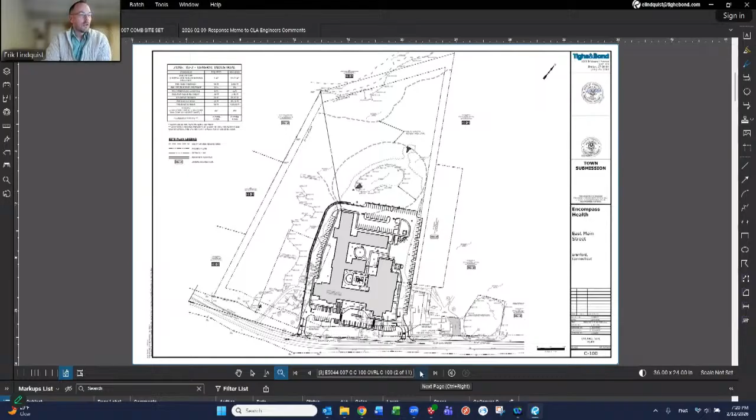This is the stormwater management plan, which shows the grading along the sides. This is broken up into two sheets just for clarity. It gets kind of confusing if it's zoomed out too far. But there'll be a series of catch basins around the entire site. I would say about 90% of the drainage, I don't have the exact number on me, but I can get that for you if you need, goes out to the rear pond.

There is one structure here with a water quality structure that will take runoff from this area of the front of the parking area. This is simply because we want to intercept this flow before it gets out onto the state roadway. And we provided a separate discharge here with a level spreader that will control flow and maintain flow to the wetlands.

Obviously, I'll get to a watershed map in a little bit to show the comparisons and how we're trying to match and make sure we're being consistent with drainage patterns on site, which is something we always try to achieve and maintain. But the large mass quantity of the runoff does go out to the rear of the site, and that can be seen here. So from both sides of the building, we have the drainage coming out back.

There'll be a water quality structure in the rear of the building, which will provide removal of sediments and oils and things of that nature before discharging into a sediment forebay, which will help alleviate some of the sediments that do make their way through the structure, the smaller particle sizes.

And then there will be a wet detention pond at the rear of the site, which will maintain a permanent pool sized for the water quality volume of the site per DEEP requirements for a wet pond. There will be an outlet control structure on the far northern corner of the pond, which will have a low flow orifice to maintain that permanent pool within the pond and a vegetated shelf with the preferred wetland species.

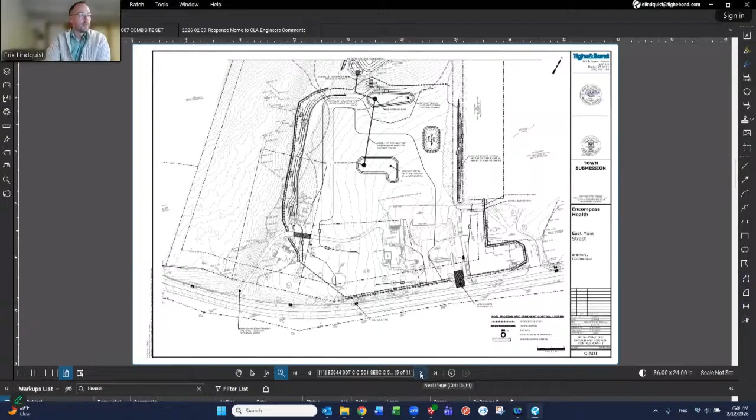We would provide locations for sediment traps to collect sediment from this flatter area that we're going to have to excavate and kind of maintain out there until the building gets started. Those will help alleviate throwing excess amounts of sediment out to the retention pond. So this will get further elaborated on in the revised sets. One of the comments that came back from peer review was how the pond was going to get phased and constructed. They came up with some very good questions, which we're going to be incorporating into the plan. Essentially, we're going to have two storage piles back here that will be part of the erosion control plan.

One will be for spoils from the pond as we remove material, so the lower layers of material that are pulled out to make the appropriate volume in the pond will be staged in one area so that they can be dried and then potentially reused on site. Then there'll be another pile for invasive species that'll be allowed to sit on another staged area over on the side, which will allow those to dry out and then be removed from the site and taken to a landfill. Obviously, we have further erosion controls back here.

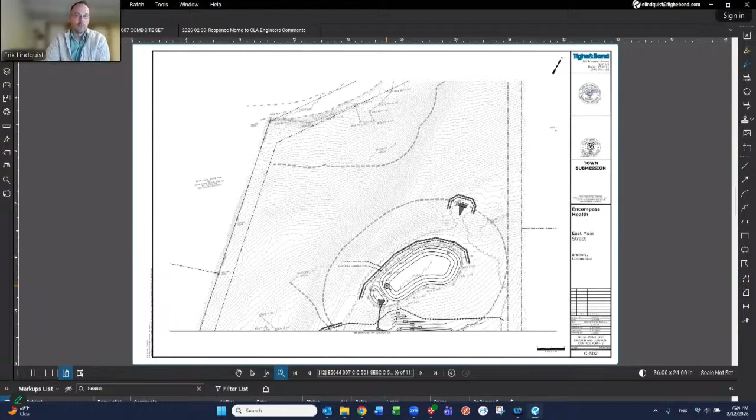There were questions about how this will be dewatered. There'll be a series of hay bale checks that come down the hill. Those will also be added to this plan. The pond will be pumped out in this location. And the idea is to have this work done as early as possible, have the pond stabilized before we start discharging flow from the site to it so that it's functioning and operating to the effectiveness that we are looking for. Moving forward, these are obviously the details for the erosion control. We don't need to go through all these.

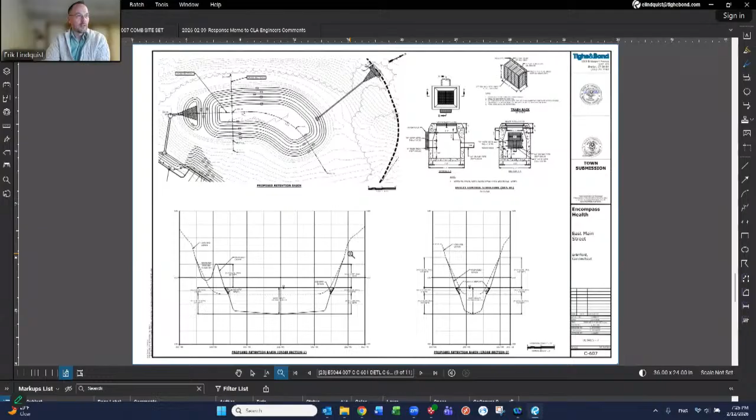The area where we're demoing the building over here, this will be grass mostly with some trees to help provide a nice buffer. There'll be various landscape buffers along the property lines to the neighbors. We're trying to maintain the tree lines on all the other sides and provide some plantings at the base of the wall. We're going to probably beef up the plantings in the close proximity to the wetlands.

That was another comment that came from the third-party review as well as the town review about the proximity of the wetlands and just trying to do things to help protect that close range of construction activities. But this will be a retaining wall right here that will help protect any degradation to the wetlands, because retaining walls are excellent for preventing erosion down the hillsides. They kind of act as a barrier wall. So the placement of this wall is actually in a great location for helping prevent and protect that wetlands.

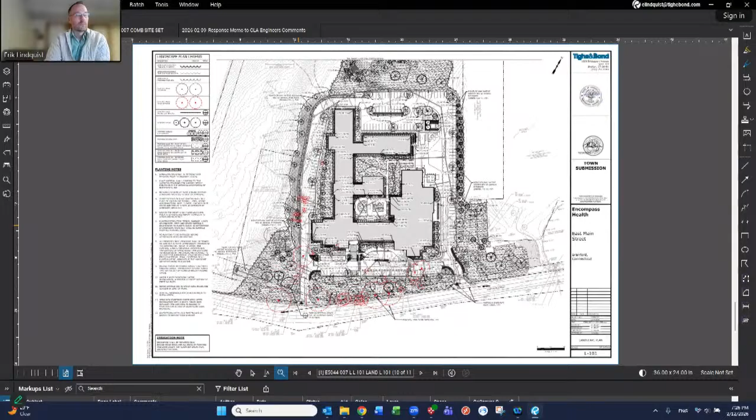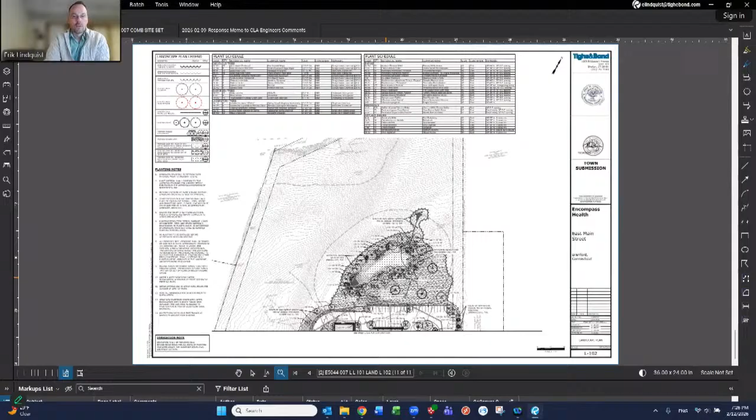As noted before, there will be a series of wetland plantings and enhancements to the wetland to make this a more functioning and aesthetic wetland. So those are shown here, and those have also been reviewed by the third-party engineer. So that's essentially the layout of the site and what we're proposing out here. I'd be more than happy to answer any questions or go through the memo from CLA Engineers. But I'm more than happy to pass it along to you, John, if you want to take it from there.

Thanks, Erik. So I think we're doing pretty well, Mr. Chairman. We're only at 7:27. So if you want to go to commission questions or the peer review, then we can continue on. Yeah, I think it would make some sense, since some of the peer review items have been addressed by Mr. Lindquist's comments. Maybe we go to the peer review, and then the commission can have both of the material that was reviewed to comment on. So why don't we turn to the peer review folk and see what their comments are at this point.

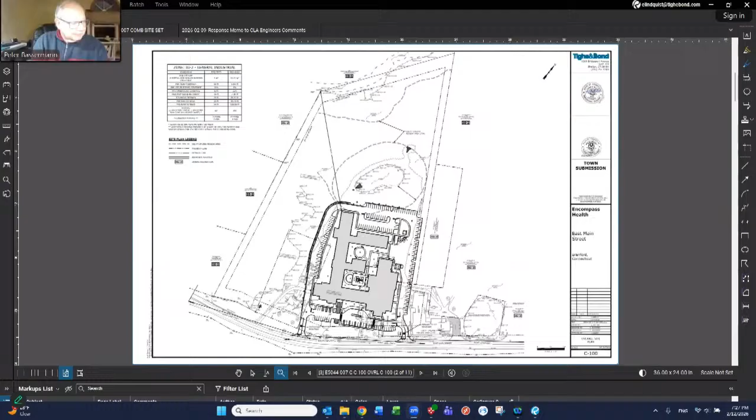Sure, I can start off. Kyle Hobbert from CLA Engineers. We're located... Can you turn up your volume a little bit? Oh, sure. How is that, better? Oh yeah, good.

Okay. Good. Again, Kyle Hobbert from CLA Engineers, located at 317 Main Street in Norwich. I'm a professional engineer with the company. I did the engineering review for this project for the third-party review. And with me tonight is Bob Russo from our office. He's a certified soil scientist, and he reviewed those aspects of the project. Bob and I both walked the site on January 23rd, prior to the heavy snowfall, thankfully. And we also reviewed all of the application documents, the plans and the reports that were submitted as part of the application. It was a very thorough set of documents and reports and plans that were provided.

We then went through the documents and provided a series of about 26 comments to the plans and to the reports. We have subsequently met remotely with the applicant's team, and they had provided a response letter noting how they would plan to address the comments in our letter. And essentially, I think their plan to address the comments from our letter is appropriate, and when incorporated into a plan set, would be in good shape. And Bob, please feel free to add on to any of your comments.

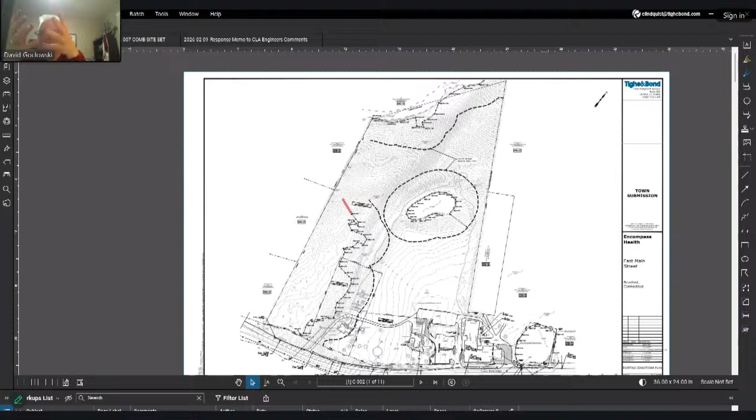This is Commissioner Goclawski, and I'm not sure who can answer this question. You're going to enhance the current man-made pond. Is that correct? Correct. And are you making it deeper? You're not making it wider or bigger. You're just enhancing what is currently already there.

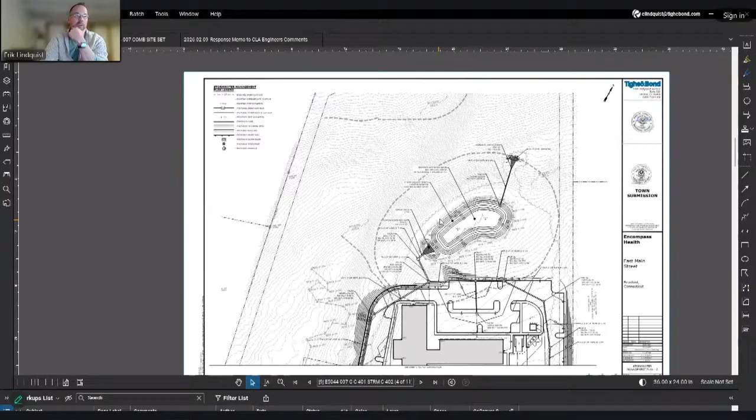Yes, what we're doing for the pond is the limits of the grading. So this is the berm of the pond, and if I zoom in, it's a little clearer. But this right here, where the wetland line is, is essentially the berm of the pond. This is where it's flat, and you can kind of walk around it and have maintenance, and this is the grassed area as you walk out the site. From the berm in is where this work is being done.

So essentially, we're going to be carving out this pond to provide the DOT or DEEP required wet pond parameters. So you need to have 1-on-3 slopes with, I believe, a 1-on-6 vegetated shelf at the water surface line, and then it goes at 1 on 3 again. So in order to meet those requirements and what they lay out in the stormwater quality manual, that's how the grading has been done, and you also have to have, I believe, a 4.5 foot standing water surface elevation, which discourages phragmites and things like that. So it needs to have a certain depth. So all those parameters are what have built this, as well as the water quality volume.

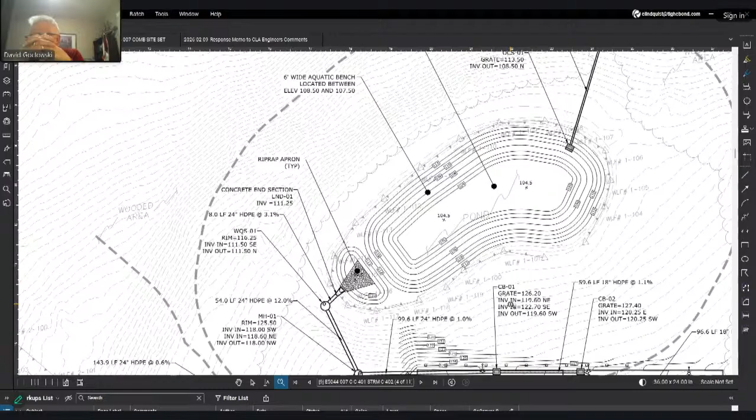So at the end of the day, there will be a little extra excavation out of the bottom of the pond, likely. I don't know the exact bottom depth of the pond. We didn't go out there with a pole and measure it, but my expectation is that it will be cutting out a couple of feet. That will take this down a little bit deeper, but the perimeter of the pond, none of that will change. It's simply reshaping the interior of the pond. So the point is you're trying to make the pond better than it currently is. Correct. Okay. Thank you.

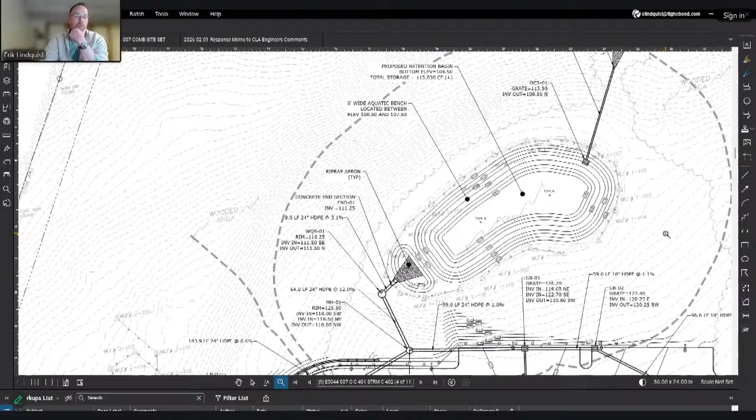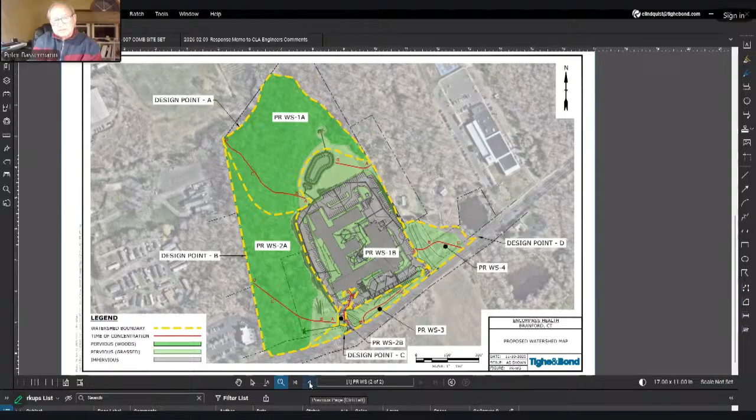And a different question, this is Commissioner Bassermann. I believe you said there was no hydrological connection from that pond to anywhere. Is that also true of wetland number 3 and the pond there? It's self-contained, it doesn't go anywhere? Matt, I could let you speak to that one.

I did not delineate any way that it would connect off-site. However, it's possible that it does. It's possible that there is a culvert, but that was not the point. We're not doing anything over there. So I don't think that, if it does connect, it would just connect across the street. But again, I did not see while I was out there a culvert that went underneath the road. That doesn't mean that it's not there.

Erik, I don't know if there was a survey for that area to pick up a culvert. I don't recall seeing one either. There is a wetland on the other side of the street, and there may be connectivity between these two. It just wasn't in our area of review, and we didn't necessarily look at that because our scope was in this area. But like Matt said, there may be a culvert in there. I could look at the survey and see if there was something, but I don't recall seeing anything.

And what's the disturbance in the area that abuts that pond? It looks like you got the yellow demarcation line. What, if any, disturbances are in that area? This isn't a disturbance line as much as it is a watershed that's just delineating where the flows are going for this design point. So point A is where the flow is going. So this is just the water area that's going to it. So we're obviously not disturbing the dark green areas up here either.

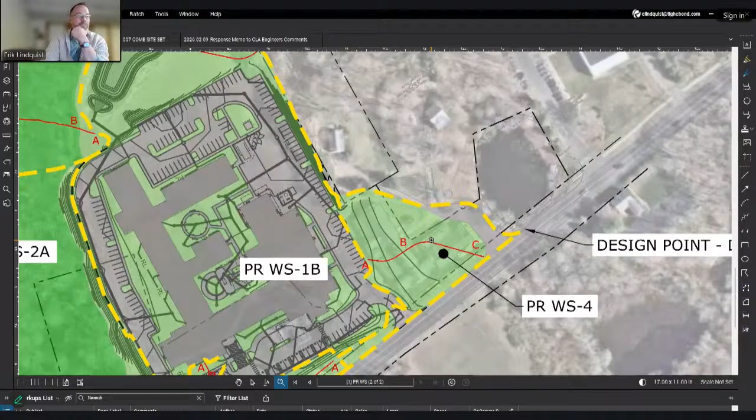So basically, if I go to the proposed plan, you'll see there is an existing building here. It's a little hard to see. It's the existing commercial building that's here, L-shaped. That's going to be demolished, and this is going to be turned into grass and plantings. There's an existing driveway that services these two residential buildings that will be maintained through here, and that's not changing. So from the wetlands, you're going to have an existing driveway to remain. So that's your immediate connection that won't be touched. And then everything to the southwest of that will be demolished and enhanced by plantings and grass and things of that nature. Thank you. And that red line BC, I couldn't read the legend.

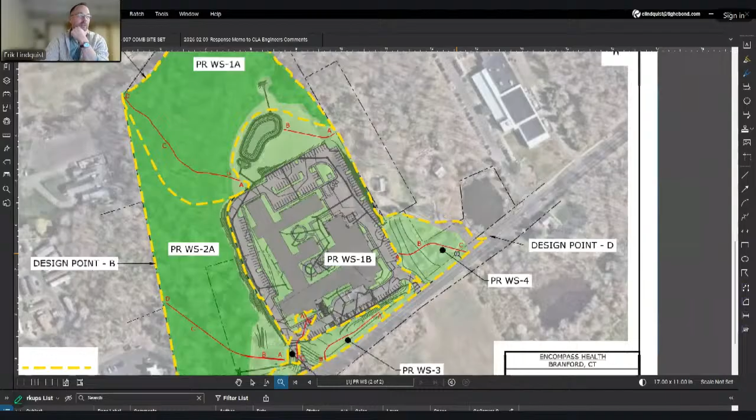That's a time of concentration path. Essentially it's the hydrologically furthest point away. So when we're measuring flows for a watershed, you need to understand how long it takes for a drop of water that lands in the hydrologically most remote point to make its way through there, and that's how you calculate flow for a watershed. So that's just showing the longest path of water that falls in that watershed. That's the longest path through here, and that's how we determine flows. Thank you.

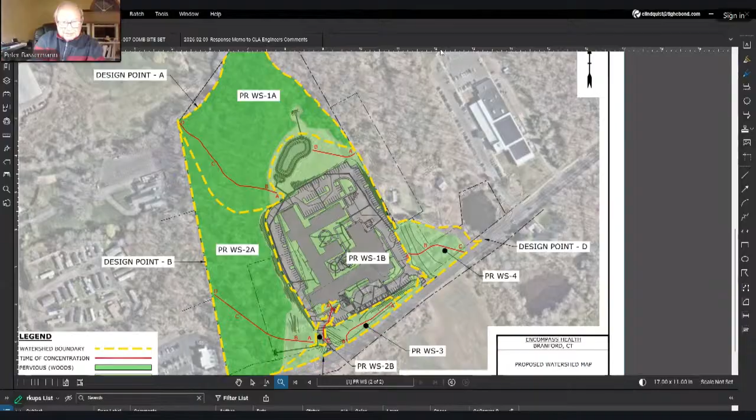I guess at this point, it's commission time. This is Commissioner Bergemann. I had two questions. There was mention of a 4-foot high metal fence with vinyl mesh. Is that a temporary fence around the pond, the big pond in the back? No, that was a request, and it's something we typically show. You should have safety fence around a pond, so children don't come up to it, or anyone goes into it or trips into it. It's a security hazard. So fences are added for that.

So one of the ways to address that is we chose a black vinyl mesh chain link fence that's 4 feet tall. The reason I personally prefer black vinyl is from a distance you don't even see it. It blends into the background. So I think those are aesthetically the best looking, but people have used split rail fences, which people like because they're more natural looking. But I don't think they provide the safety measure that they're intended to provide, so I don't prefer recommending them.

Commissioner Bergemann. So does that change the value of the wetland, because it's going to be a barrier to critters that crawl to go to that area?

Matt, I could let you speak on that in terms of chain link fence. It depends on if the chain link fence will have a... it'll be wildlife friendly. So sometimes these types of fences that are meant to keep humans out, they can have a gap in the bottom that would let certain species pass through. So if that's something that the commission requests, Eric, you could speak to if that could be something that could be included in the design.

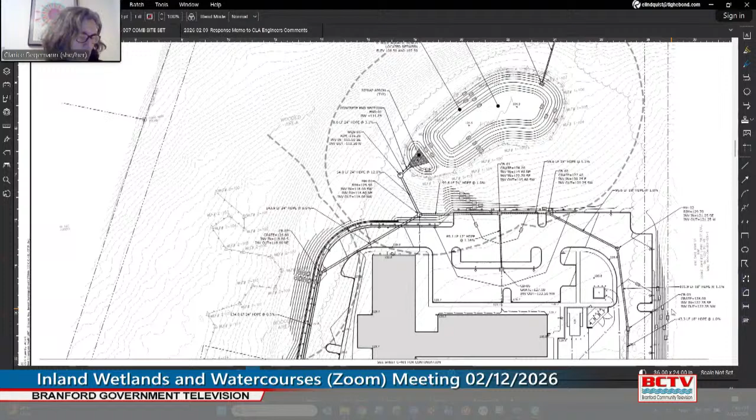This is Commissioner Bassermann. What's the construction time from shovel in the ground to occupancy? I wish I was better with numbers and timeframes. I don't recall off the top of my head. I believe it's about a 12-month or a 15-month construction schedule, if I'm not mistaken. John, if you have it handy, that would be great. I don't have it in front of me, but I can get that number for you.

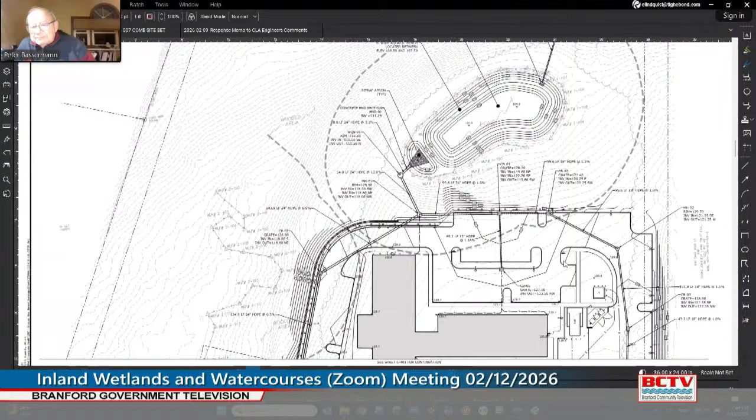I guess the concern is, as the site progresses, the stormwater management controls. How are we protecting the site as it goes through its various phases of construction if the management controls that are put in at its inception aren't the right ones as the construction progresses?

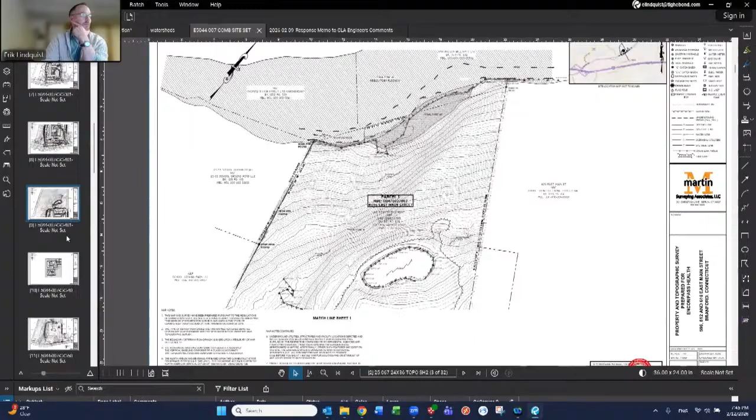Well, we do have a phased erosion control plan. I'll share the full set of drawings I have, and I can go through this really quickly. There's a construction sequence that's included in there, though we can never capture every possible scenario of stages of construction out there. So as I go through this, I showed you before the initial phase. This is even further along than probably a really initial phase, where they'd likely set up a staging area in here and start to do some earthwork in this area.

But basically, this is the initial phase, and then there's also a final phase plan, which shows more of an end stage scenario where we're still having the erosion control perimeter set up, the wall's been built, there's inlet protection and things of that nature.

There are notes included as well in here calling for the contractor to amend things as needed. There'll be inspections being done throughout the process as part of the Connecticut General Permit process. So as things are seen in the field, there'll be repairs requested, there'll be edits requested, just making sure everything's maintained and protected throughout the entire construction sequence.

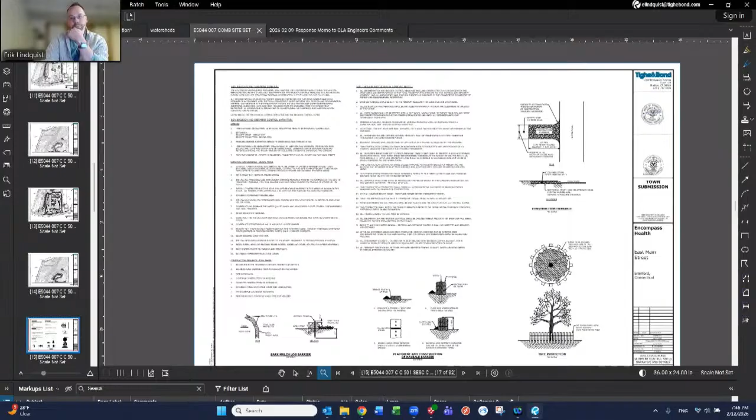This is Commissioner Bassermann again. I thought when you made your comments regarding the pond that the work on the existing pond, Wetland 1, would be done in its early stage. Correct. That's the intent, is to have this done initially.

It's one of the first things that's done, I should say, before we start discharging flow to it. We're going to want to do this correction and get the plantings in there and the slope stabilized and have this outlet control in place. So that's one of the first things we're going to want to have done, and then some more of the significant earthwork in here and storm drainage could then be done afterwards and start discharging to the pond.

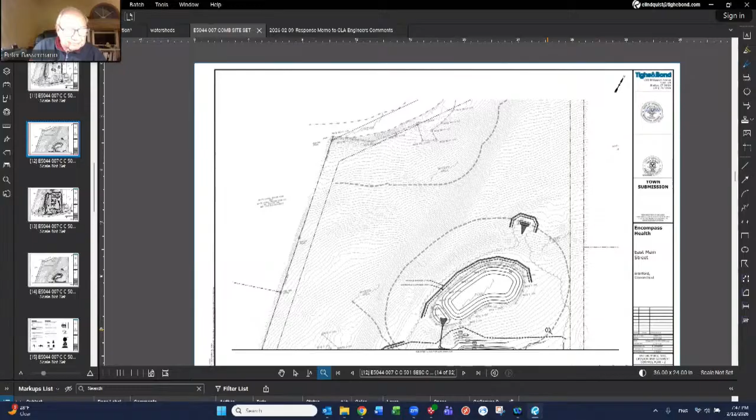And do you have a handy memory on what the construction sequence designation is on your plans? I'm not sure I understand the question. The sheet number for the construction sequence? Right here, it's C505. Thank you.

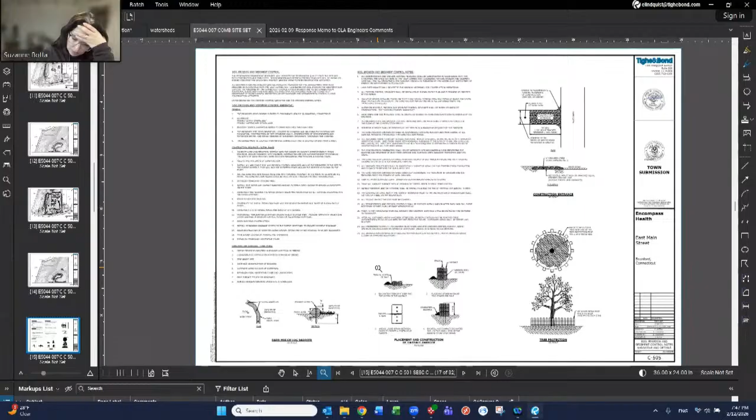This is Commissioner Bolla. Earlier, Mr. Lindquist, you had mentioned the sediment traps in the section closer to Route 1. Can you just go back and review, and are there multiple on site? Where's that sediment getting trapped before going to the pond?

The idea of the sediment trap is when you have large areas of clearing, especially when it's excavated for putting a foundation down, you're going to have a lot of exposed earth that's not stabilized. There's no grasses on it. So during construction, the mud will get moved around. So when you get a big enough area, like about half an acre to an acre, you start wanting to look at sediment traps and sediment basins to provide places for the water to go to settle out sediment. And that's what these basins are designed for.

So essentially, this whole area here is designed to go to this sediment trap right here, and the back area will go to this sediment trap so that this water is clean before it goes into these pipes and out to the pond. The revised set of plans will have the detail for this, but there's a dewatering sump, for lack of a better term, essentially a riser pipe with perforations on it and stone around it. The dirty water will come into it, and the crushed stone as well as the filter sock around the perforated pipe will filter the water, so clean water goes into the pipe and out to the pond.

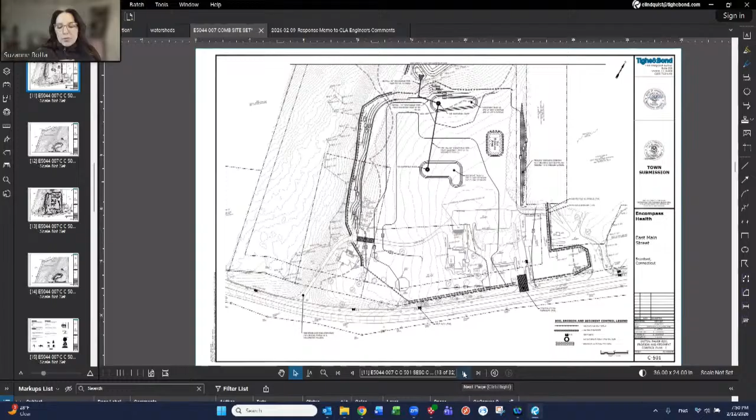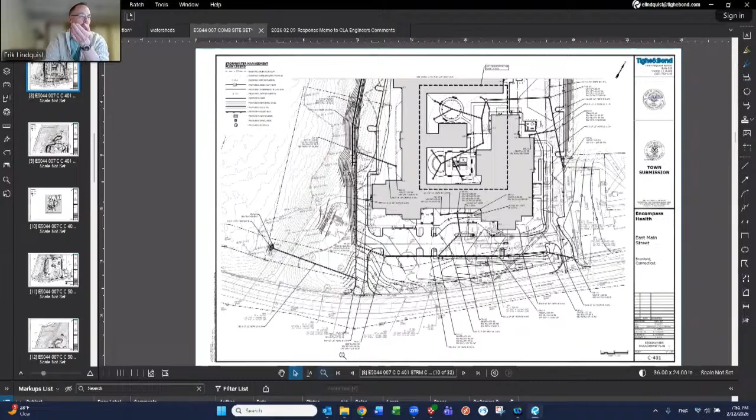And post-construction, can you walk through in a little bit more detail the treatment train for all of the site, including the roof runoff, and any different sections of the property? Sure. So basically, the building perimeter will have a bunch of roof leaders that come down and are collected around the building. I can zoom in and show this. The roof leader lines are here connecting at various places in the buildings.

There's area drains in the grassed areas. There's catch basins in the parking lot. All these things come together and they're collected. Each of these will have sumps on them, which will add some further sediment collection within the catch basins. The pre-treatment, as was discussed before, and in this case over here, we have an inlet water quality structure. So this will have that pre-treatment before it discharges.

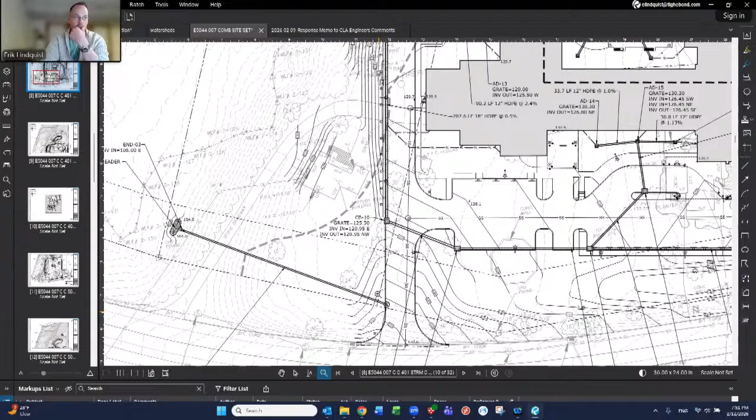This one doesn't have a pond or any retention involved with it, other than the minimal amount that's in this level spreader. But we've overcompensated for that in the rear pond because we don't have the ability to do it out front. So these large areas will go out to the back. As we noted before, there's a water quality structure here. That's the pre-treatment. The sediment forebay is also pre-treatment that allows for sediment to come out before the pond.

The small little water pond is about a foot deep. It allows the water to come in there and then go out as a level unit, so we don't have any more reanimation of sediment down the hillside. That was one of the comments that came back from the third-party reviewer, trying to make sure we prevent isolated point discharge, and we want to have that sheet flow. So that's the whole train.

There's the pre-treatment with the catch basins. There's a maintenance plan in the engineering report, which goes through how routine maintenance is done on parking lots, making sure they're swept semi-annually, making sure all these things are inspected, cleaned out, and functioning properly. And all that treatment train effect of the catch basins, the maintenance, the forebays, that's all the pre-treatment to the primary pond, which will provide your overall water quality mitigation.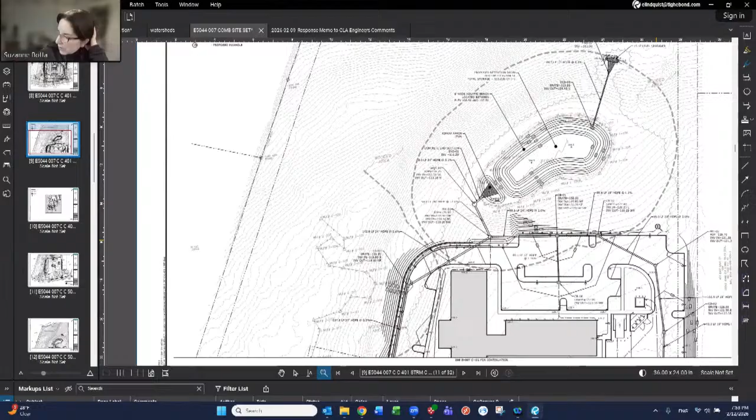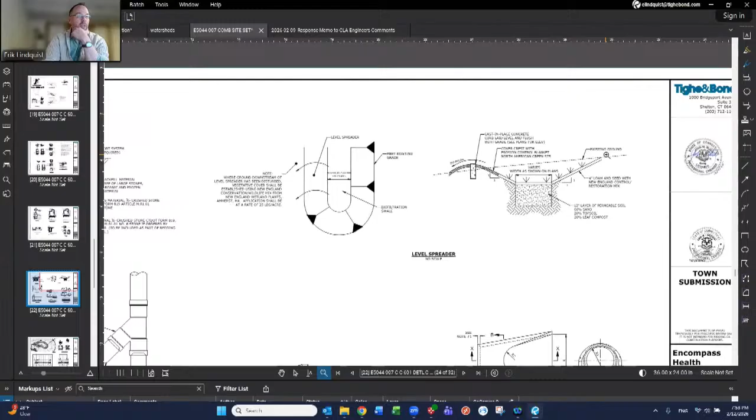Thank you. And again, Commissioner Bolla, can you talk a little bit about beyond that level spreader? That's where we start to head toward the river. And I was just wondering about vegetation beyond that. Yeah, so let me show you the detail for the level spreader, just to give you an idea of what that is. It doesn't show the outlet, but there'll be an outlet like this that comes out of that discharge.

And this is modified riprap, so it provides the energy dissipation through the rock. These are large, 12-inch stones. They'll come down the hillside here, and go into this area where the water will pool a little bit and build up about a foot before it goes over the level spreader, which we propose as a concrete cast-in-place curb that allows it to be laid level and flush to make sure you have an even level spread down the hill.

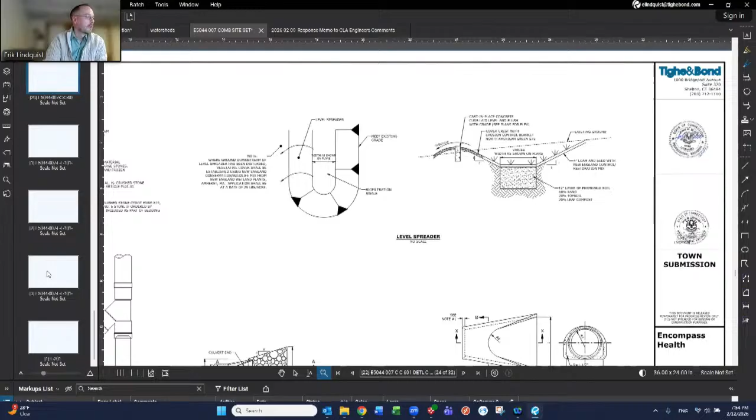And then in terms of plantings, one of the comments was to lengthen this level spreader out to take up more of this area to provide that level spread. We're also going to rotate this to better align with the contours, and I've asked my landscape architect to look at potential decorative grasses that could further enhance this discharge as well. So all three of those items will be incorporated into the next set when we resubmit. Okay.

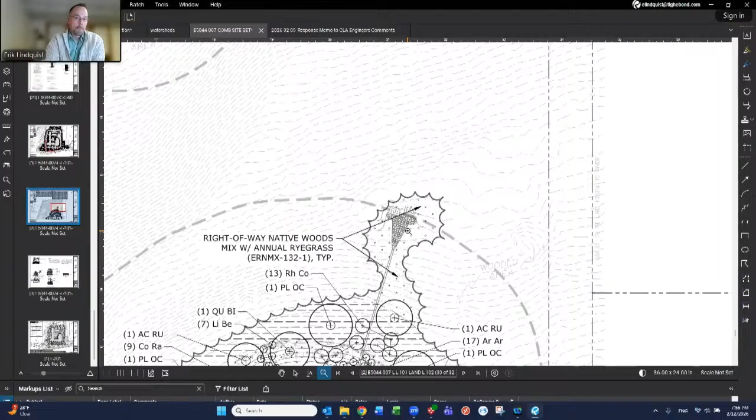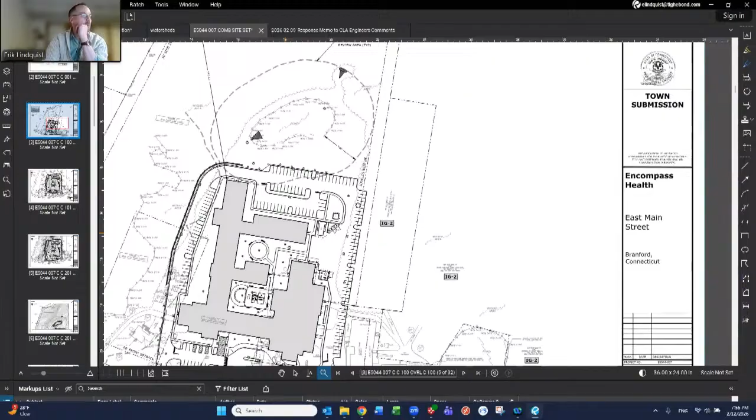This is Commissioner Bolla. Are there plans, speaking of all the snow that we've had, for snow stockpiling areas? Yeah, so I can go back to this; this might be the best plan to discuss it. So there are a few areas which we have to provide it, and maybe the grading plan might do a little better. If I go to that set, that might be a little even better to show some of this on. So especially in this area, when we put that wall in here, it's going to get a little

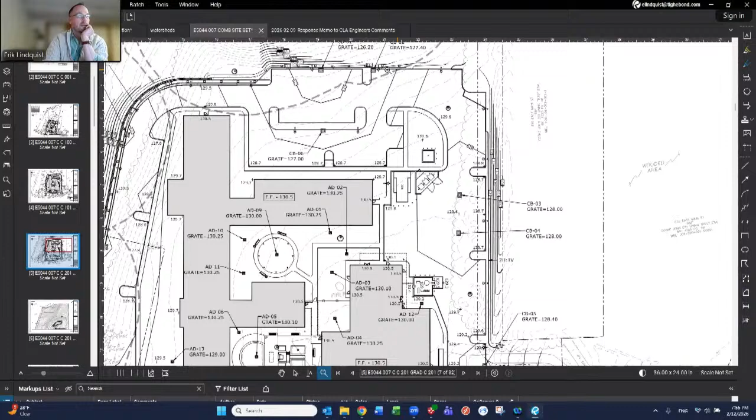flatter. So this area along the backside of the curb will be one area where we have like a 3 or 4 foot shelf to put snow. The entire back area here on this side will be able to have a shelf for snow as well. Along this side of the building, there's a considerable amount of grassed area that can be provided for a shelf of snow in this area as well as along the frontage of the roadway in this area.

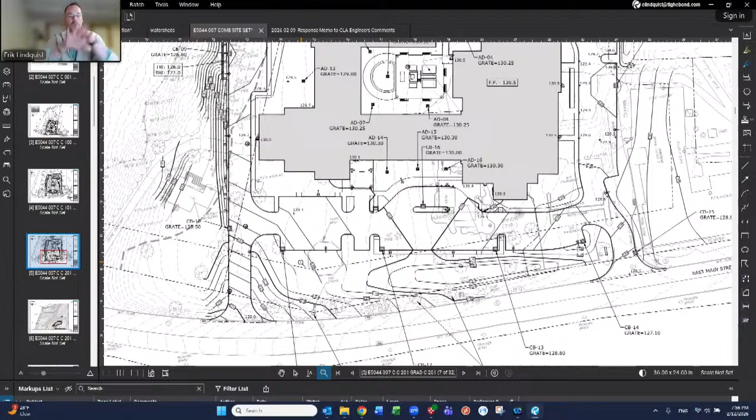We wouldn't want to put it towards the building, but along this frontage of the street where we have a little bit of a knoll here that will hide it, and not necessarily huge piles because there's not much pavement in front. But we see this area back here as somewhere we could put snow as well. So it's along the perimeters of the site. We wouldn't put anything on the high side of the wall over here on the wetland side, obviously. But we're trying to put it in places that make sense where we have landscaped areas that don't have high congested plantings. Thank you.

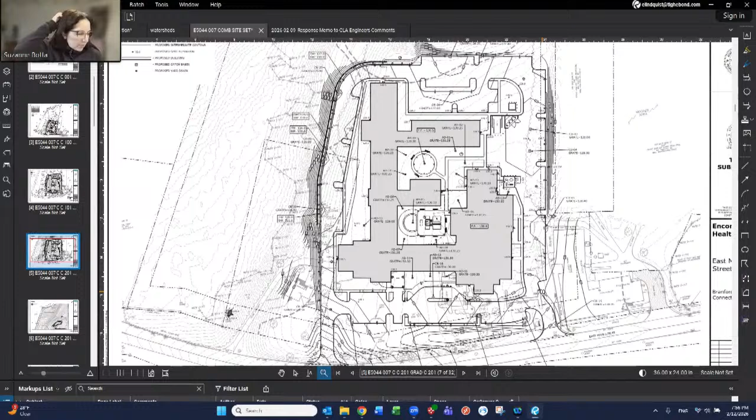Again, this is Commissioner Bolla. Can you just point out where any stockpiling would be? I know you talked a little bit about pulling the material out from the pond itself, but with the remainder of the site. Yeah, so those two stockpiles I mentioned, when we send the revised set of plans, will be located in this area, roughly right here, just in the grass area to the south of the pond.

In the other phases, and this is just our best guess. Obviously, a contractor is going to have a better understanding of where it makes sense to put these piles. I don't see a concern wherever these are located throughout this area of the site. I prefer putting them towards the back, but not so far back that it's close to the area of the ponds or anything like that, but something centrally located, convenient to where the work's being done. I think this is a good spot away from the walls, but close enough that it could be utilized wherever.

But if this location gets bigger or moves around, I'm not overly concerned with it; it could likely go anywhere in this whole area back here. Okay, and it's just the one. As of now. If they want to do two, I wouldn't want to put a restriction on that per se, because I don't know how much material is going to be generated at any one time and how they're going to place it when they put the walls in. That's really means and methods for the contractor, but this is just a general guide to give them instruction on what we think would be a wise way to do it. I'm okay for now.

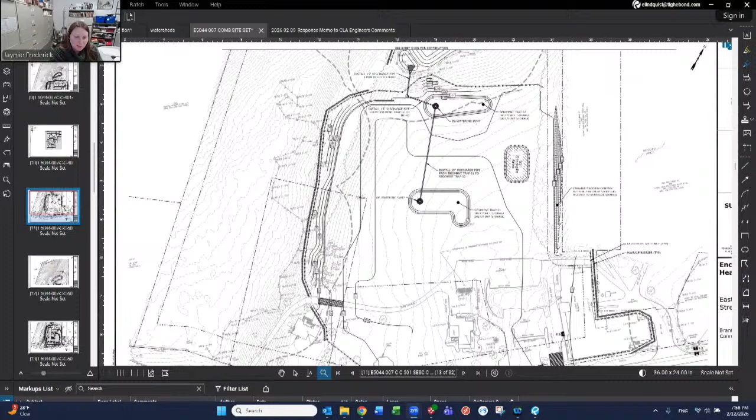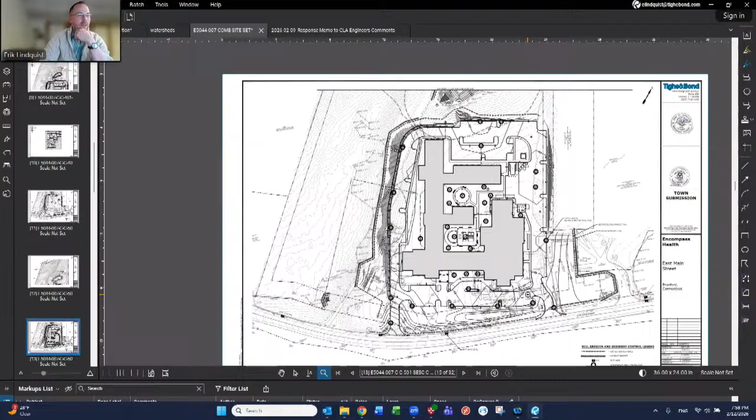Jaymie Frederick, the Wetland Agent. I do have a follow-up question in regards to the fact that there's some redevelopment. The asphalt material on site, will that be stored on site for reuse, or is that intended to be taken off site, or not known at this time? You're talking about the existing parking lots? Yeah, I'm not sure what would be done with that material. I'm guessing it will be hauled off. I'm not sure if there's any way of mixing that with native material on site and using it as general fill. There's not a lot of it, so I'm guessing it would be removed, but I don't have a definitive answer on that at this point.

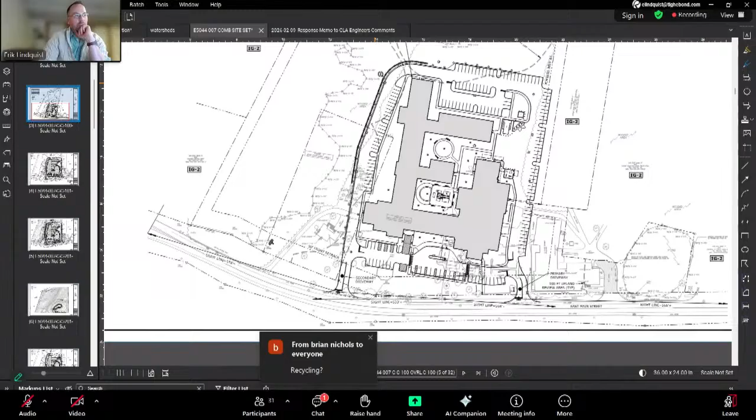That might be something the commission would look for clarity on. Yeah, this is Commissioner Bolla. I would second that, and I would just be concerned about any of that being placed on the, what side am I facing, on the western side near wetland 2. Yeah, that definitely wouldn't be used here because this needs to be a certain select fill material behind the retaining wall, so that would not be used in that area. Like I said, my guess is it would be removed from the site.

If I'm not mistaken, this isn't really the greatest material. There's not a lot of it, and it's probably pretty thin as well. I wouldn't imagine it's like a 4-foot pavement section or anything like that. Like I said, my guess is they probably stockpile it and then remove it from the site.

Commissioner Gokowski: predominantly the driveway, it's gravel, isn't it, at this time? Yeah, I think there's a mix of gravel and pavement, correct? Okay, but most of the pavement is on the side. I've got to get my bearings right, on where the original Hilltop building was. That's where most of the paving is. I think it's in this area as well, if I'm not mistaken. I don't recall off the top of my head, but I believe this parking lot here is, and this might be gravel in the back. Yeah, I believe it's all gravel back there.

This is Commissioner Begemann. Oh, go ahead. Is somebody going to follow up on that? No, I'm all set. I just remember that when we did the site walk, when we were walking up the driveway, I don't remember seeing any pavement. The only pavement I remember is closer to where the actual Hilltop Orchards building was, and that area there was pavement. I don't remember the other part of the driveway having any additional pavement around the houses themselves. Right. I think you're correct.

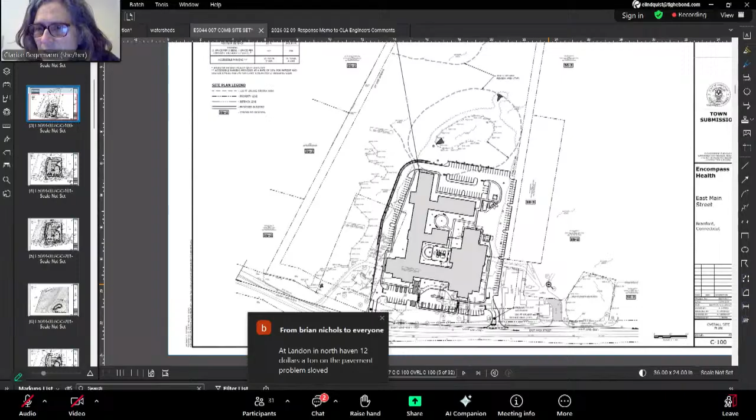Commissioner Begemann, this is a different topic. Do we know if there are any underground oil, gas, gasoline tanks in the old property? And kind of new for me, when there's a big demolition happening, what goes into checking the land for toxic substances? I believe there was already a phase. It wasn't done by us. I can track it down, but I believe there was a Phase 1 already done for the site, and those things were identified. I don't think there's anything of concern on site related to that, to my understanding.

Thank you. This is Commissioner Bassermann. When you send in the revised plans, is it possible to have a sheet or a section of a sheet that would list the various inspection timeframes? Not so much the clock time, but after what activities would there be an inspection? Like I said, that's in the engineering report, and it's part of the maintenance plan. So it's not spread amongst the various sheets. It's in the report.

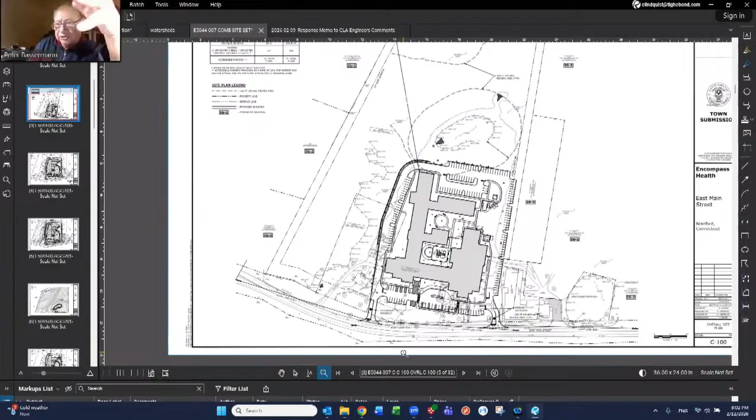So there'll be an actual maintenance plan, and that maintenance plan will be included with our general permit. That'll be part of the general permit that's kept at the construction trailer for the contractor. He has to maintain it on site during construction. Basically, the post-construction maintenance plan is just part of it, but there's also maintenance during construction as well. So that would all be part of the contract documents, per se, for what's being done out there.

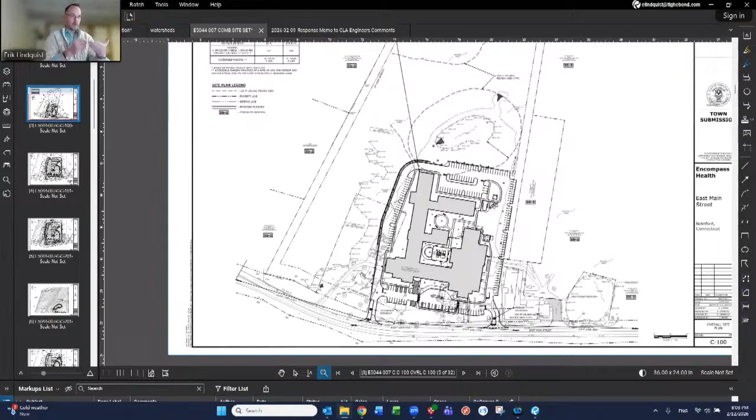Yeah, I would rather not go through a bunch of sheets to get specific data. Is it possible to line those up on a sheet so that it's easy for those doing the inspection, the staff for instance, to identify that easily? I'm not sure it would be easy to put that on the plans, is my concern, because it's kind of like a checklist that the inspector goes through and documents they did the inspection. I'm going to try and find this so I can show you essentially what I'm talking about, if you just bear with me a second. Sure.

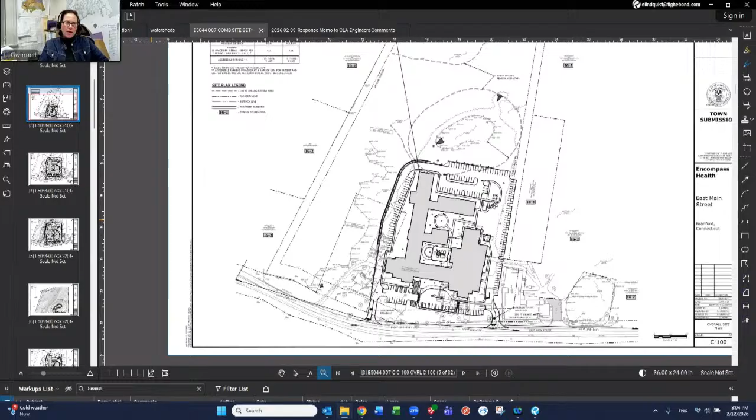This is Heather Gwinnell, Wetlands Officer. Commissioner Basterman, are you asking about at what stage in the construction process, or are you talking about a list of the items that get checked at each inspection? I know that as the different activities occur, there's an opportunity for inspections to make sure that there isn't anything, as a result of the construction, that gives us concern.

So if there were identifying activities that said, once we've completed the wall, for instance. Oh, you're talking about that. Okay. Yeah, that kind of thing. This is post-development maintenance here, so this isn't what you're talking about. But as part of the general permit, we haven't done a SWPPP for this site yet. That's why this is so important.

When I talked about the SWPPP having a maintenance plan in there, there's actually the DOT, or DEP, has a protocol of things that we have to have on site, like checking where petroleum's stored and all sorts of things like that. And that's what the general permit is for, because it's for construction and dewatering wastewaters from construction activities. The whole point is to make sure things are being protected properly. And you're going through those.

It tells you after a rain event of such and such intensity, you have to go out there and inspect the site. It lays out all those things, and the contractor is required to follow the general permit, and that's made part of the contract documents. So they'll know they have to be out there after every rain event, checking all their erosion control measures. They'll have to have a third-party inspector come and make sure they're all operating properly. So all that is part of the general permit.

Thank you. Amy Frederick, the wetland agent. I have a couple of questions once commissioners are done asking questions. Commissioner Bassman, when do you expect the additional material to be available? I've had most of the changes already incorporated into the plans, so I was waiting to see what came out of this meeting before having them finalized. So I could probably have it done early next week and have something back in by then. Okay.

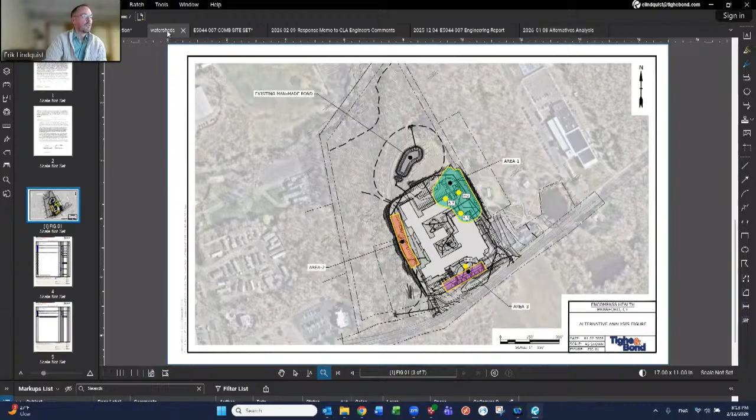I showed the watersheds before where we're trying to maintain the same drainage patterns for existing and proposed. So you can see there's a discharge that goes out to the river, an existing discharge that kind of comes out here and goes down and ultimately to the river. There's a watershed that goes out to Route 1. All these locations and all these watersheds we try to maintain. And our engineering report documents that in each of the storm events from the 2 to the 100, we're matching peak flows to all of these locations. But there is a slight increase in volumes from the pond due to the fact it's not infiltrating groundwater.

Mr. Lindquist, this is Commissioner Bolla. While we're just looking at this watershed image, I can't see the bottom of the key at the moment, and I was a little confused about why. So if I look at this, the watershed 1B, and then where you have

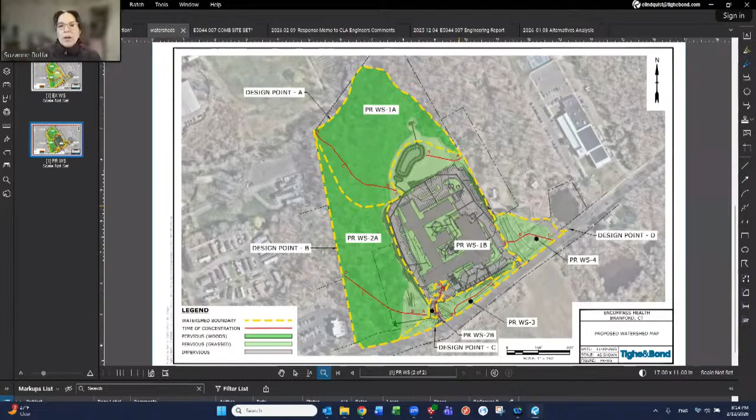the discharge with the level spreader. This up here? Yeah. It looks like that is still in that lower watershed as opposed to being in what looks like watershed 1A. I'm just confused by that because it looks like everything in level spreader one is downhill, and so I don't know. My brain can't make sense of this image.

No, and I've been doing this for 20 something years, so it's just second nature to me at this point. So trust me, I get it. These things can get confusing. So everything in 1B is what's going to the pond. So this yellow line here shows all the area from the building, the parking areas, everything that's going to the pond. Okay. The level spreader is what's, essentially once it goes to the pond, it then goes to 1A. So that's why it's 1A and 1B.

They're essentially watershed one. We're just showing what goes to the pond and what goes to the river, and they're both good. The coloration is just ground cover. Really gray is impervious pavements, light green is grasses, dark green is woods. Okay. That makes more sense. Looking at that level spreader, it looks like it's in a different, no, in the same watershed, but it's not. It's beyond that hatched line.

Everything in one goes to the river. It's just 1B goes to the pond first, 1A goes directly to the river. It's just to differentiate that, because how we model it, we have to model what's going to the pond so we can do the controls, and then it discharges, and then we combine those to what's going to 1A. So that's how we have to model things. Mm-hmm. Okay, thank you. Yep.

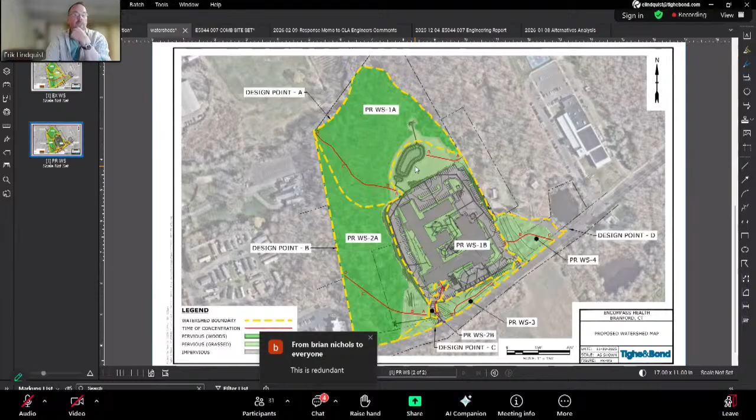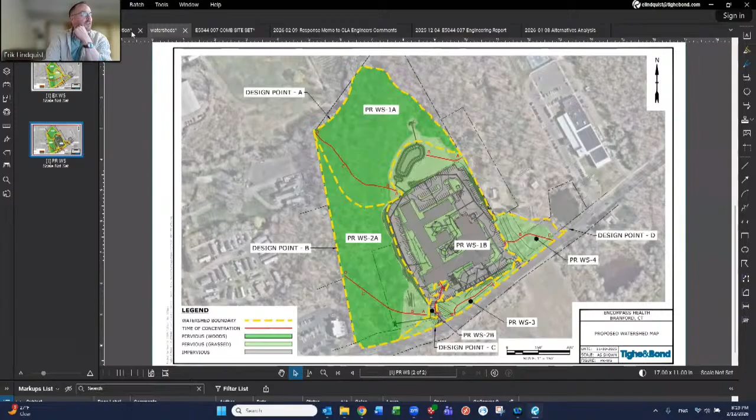So you're able to work with the water in the pond? No, that's the point, is to get the water out of the pond so we can do— Right. So where does it go when you're going out of the pond? So that's what I mentioned earlier, and that's going to be enhanced when we do the revised plan set that you're going to be getting. So what's happening, if I can get to the right sheet here.

So what we're going to eventually do, and I'll just kind of sketch it in here, there'll be a dewatering sump here, and essentially we'll have a discharge that's pumped out here. And what we're eventually going to do is have a row of hay bale check dams that go down the hill, that the pond will be pumped out to these check dams, and they'll have wings on them and stuff. So the water goes into it, gets checked at the hay bale, overflows, it goes to the next one, gets checked there, goes to the next one.

That allows sediment to come out. This will be as clean as we can get it, but this is providing additional tertiary treatment for potential sediments that would be dewatered. But this is the approach to dewater the pond so that it can dry out, and we can do the sediment removal from the spoils and the phragmites or whatever are there, and stockpile them up on the side. So that's the approach we're planning on doing. And that was discussed with the third-party review engineer, and that was part of the discussion and collaboration we had with them and their concerns in their letter that we addressed.

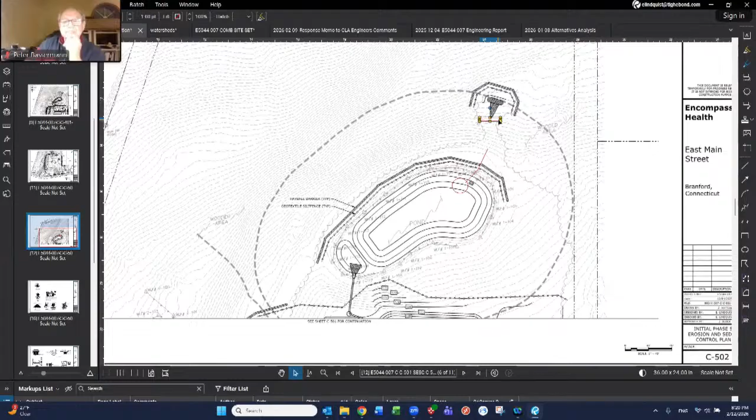Thank you. This is Commissioner Bolla for Mr. Regan. Can you just talk a little bit at the level spreader? Can you talk a little bit about the downhill soils? And do you know what kind of soil is there? Its composition, how sturdy it is? I haven't done an in-depth soil analysis or a geotechnical analysis for where the level spreader is, if that's what you're asking me. I would assume that the soils at the location of the level spreader are suitable for that. Eric, if you could speak to that in regards to the load on the soils.

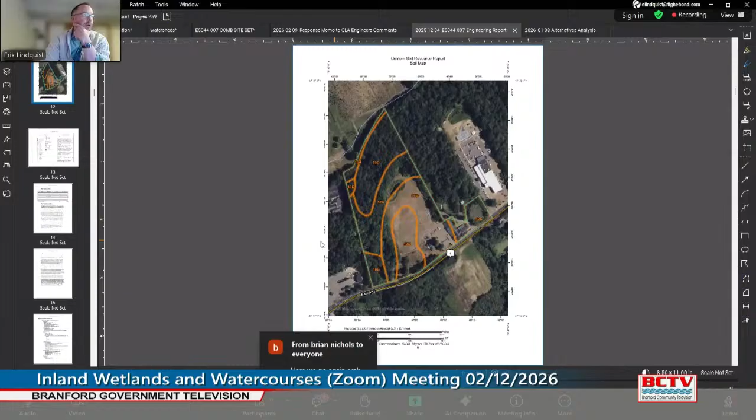Yeah, so this is just an overall soils map of the area, and they're 87C, so we're talking about a loam on a steeper slope. So it's going to be a soil that's on a steeper slope, so it's in good shape. It's not just eroding down the hillside currently. So I don't see any concern with this loamy material being used for a level spreader, especially with the checks we're providing and the controls and the detail I showed you of that level spreader. So I don't see a concern on that, but we didn't go out there and do any sampling of the soils or anything like that to verify anything other than that it's a suitable material on a slope that's not eroding, and there's no concerns over there currently.

Yeah, this is Commissioner Bolla. I think that even on the site walk, that was something that caught my attention. We do have some sections of town, not super far, where the soils are highly mobile, and the purpose of the level spreader is to slow the velocity, and the idea of putting additional plantings beyond that to prevent any initial creating of rills, etc. I think we've seen some pretty significant damage from small amounts of concentrated water.

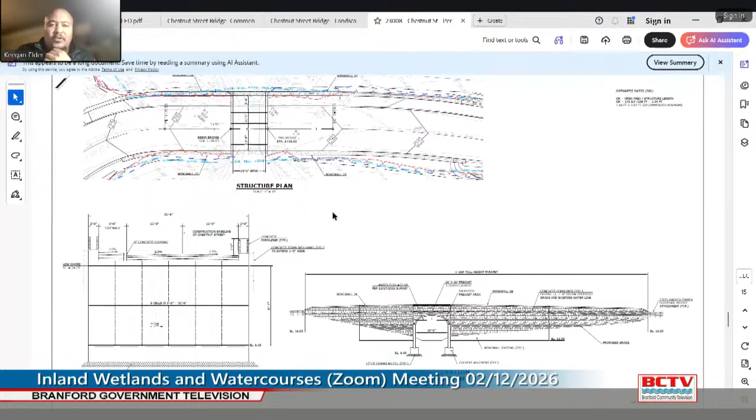So this project involves replacing the existing failing structure over Chestnut Street between the Branford supply ponds. On your screen is an overview of the bridge that is going to replace the structure that's there. Roughly a 16-foot span structure, which is wider than the existing structure, creating more water course and more habitat in the channel. In conjunction with the bridge work, there'll be a concrete sidewalk installed on the northerly side of the road, and along both northerly and southerly sides of the road, retaining walls to maintain the roadway safely in that area as well. The road will consist of bituminous concrete. We have concrete parapets and the culvert that the water is going to convey through.

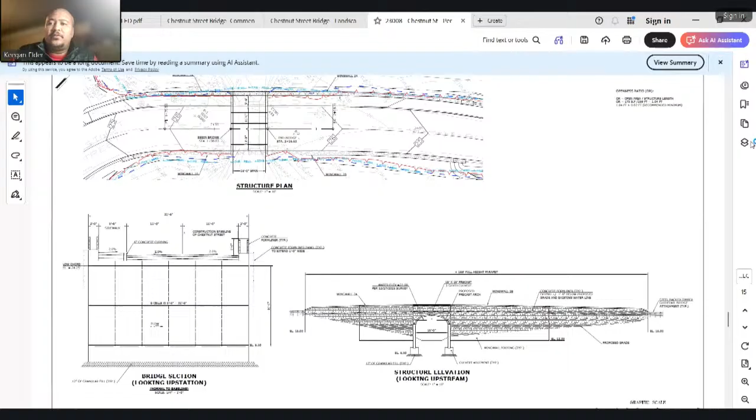For the work and the sequence of the work, we intend to close the road to construction. As part of the bridge work, there will be some roadway reconstruction approaching the bridge from the west and from the east, reconstruction of the driveways. To perform the work, we'll be installing temporary cofferdams and turbidity control curtains to protect the construction area and make sure that we maintain flow and clean flow throughout the project. This project has been submitted to the DOT and DEP for their review. Fisheries, NDDB, and Army Corps and DEP have chimed in. The next step in this process, after local approval, is to submit our final permit to the Army Corps before moving forward to construction.

So back to the sequence of work. Once we get out to the site, the road will be closed to traffic. Construction is anticipated to take roughly 8 months of working time, given our sort of delayed schedule in getting started this spring. There's a potential that it could start in the summer and go into next summer with some winter shutdown periods involved, depending on how bad the next winter is going to be.

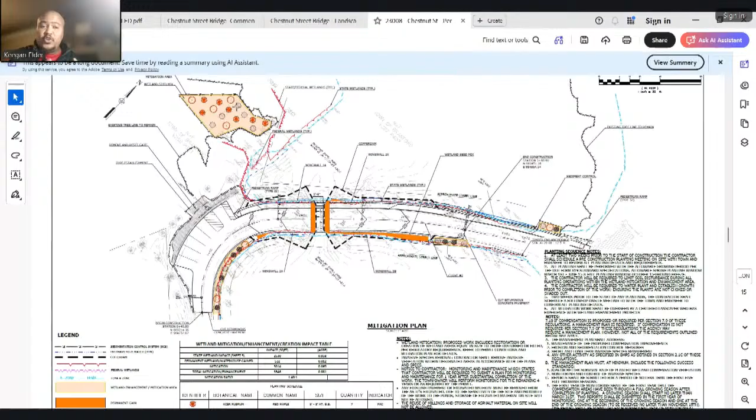Areas along the embankment and roadway parking lot, those are these areas. Those areas can be worked on with mechanical equipment, as long as the equipment remains on the road. The wetland enhancement and mitigation area further back, the recommendation is no heavy vehicles should be used in this area, and limit disturbance to that area as much as possible in doing any clearing. So those notes are included in our mitigation plan and in the mitigation letter with respect to comment number 4.

Vegetation management goes into each of these areas as to how to treat those areas. And then the upland buffer protection area, effective implementation methods used to rehabilitate these areas, and how signage and field workers will be in these areas to protect from deer in the future and things of that nature. So that mitigation plan goes very in-depth addressing how it's implemented in the field.

Comment number 5, invasive species management and monitoring. So we provided more details on that. Comment number 5 refers to number 2 on the landscape architect, Talcott and Associates document. It calls for inspection, allowing municipal agents to inspect the land throughout the life of the permit for ongoing compliance. It calls for annual inspection for invasive management and monitoring. And it also calls for a typical monitoring period that lasts up to 5 years.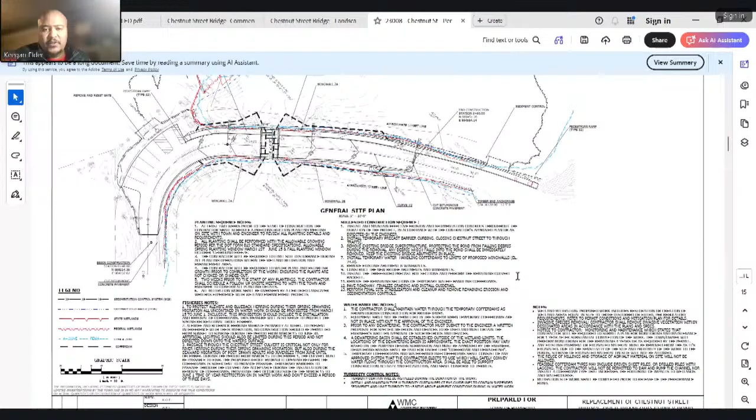This is a heavy-duty type system designed for activities in rivers and ponds where there is potential for significant flow and movement of water, which is what we have. Type 1 or type 2 of the turbidity control curtain are more light duty. This heavy duty curtain is ideal for these conditions. And those curtains were added to the plans as requested.

Give me a second. Yeah.

On sheet 13, we show the turbidity control curtain installation alongside the temporary cofferdams. Notes for the turbidity control curtain: we talk about the particulate removal. We talk about the duration of the installation, or how long the turbidity control curtains are going to be in place while the work is being done.

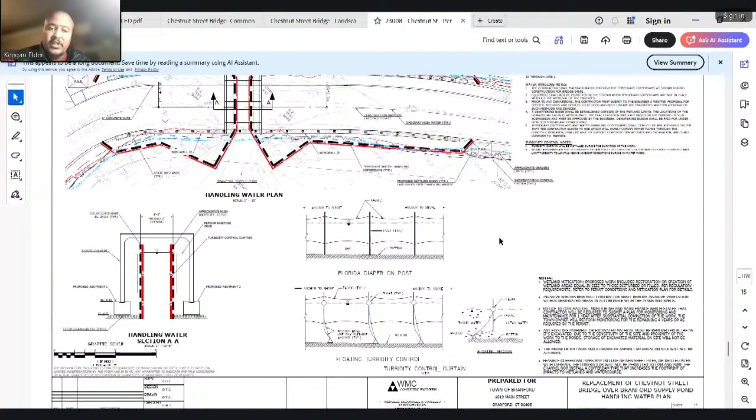Moving on to comment number 9, timing of when mitigation will be completed. When will mitigation occur relative to the rest of the project? That is also answered in the Talcott and Associates letter, number 3 of that letter. All plantings shall be performed within the allowable growing period. This is also in the plans as well, but was confirmed and substantiated in this letter.

Given durations when planting can occur, invasive species control should take place as soon as the project is mobilized, and these activities could take longer. And no planting should take place until invasives are controlled in the replanting areas and preparation is complete. That ties into one of the other questions later on, and we'll expand on that when we get there.

Comment number 10, general construction sequence for mitigation. That goes into number 4. I try to keep these in sequence with the letter. Pre-construction talks about how we maintain and monitor. We talk about the pre-construction meeting. We also talk about the growing season again. And then all mitigation work to be overseen by a certified landscape contractor who has experience with wetland enhancements,

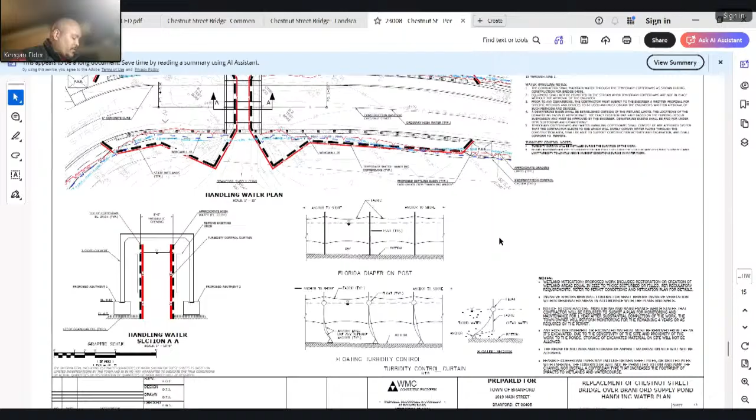Any particular concerns that should be addressed when planting in a stand of Phragmites to ensure plant survival? If Phragmites will be treated through herbicide, are there any timing concerns for plantings? The soil scientists investigated this and gave a couple of responses. Wait for control. This often takes 3 to 5 years of herbicide application. That would be included in the contract documents. So this work has to be done before any plantings are installed to ensure the survivability of those plants.

And integrated management: late summer herbicide applications by a licensed professional, winter mowing or mulching of dead stumps to open the marsh deck, and then annual monitoring and retreatment of problem areas. So those are all going to be included as part of this project in one way or the other, to be performed by either the bridge contractor and or the town and its forces, including hiring a landscape architect as we extend through the project life.

One more comment that we received beyond those 2 sets of comments was in regards to the functions and values. Comment number 15, I'll read it out to make it clear for everyone. Did the applicant address, or was the question sent to the applicant about discussing the change in values and functions of the wetlands from the earthen shoreline with vegetation to a water cement shoreline? The applicant is counting the earthen areas taken out as part of the mitigation area for invasive removal, and the new area of water abutting the new concrete walls is being counted as increased wetlands.

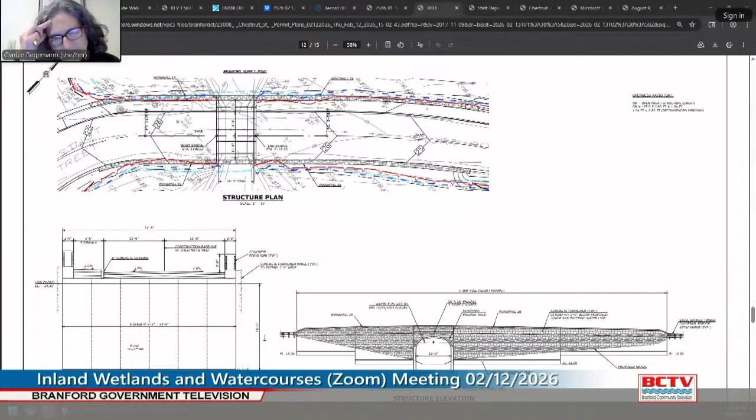Commissioner Bergemann again. Under the suggested construction sequence number 12, you talk about a guide rail, but I don't remember us talking about a guide rail. Yes, so there's guide rail being installed on all four corners of the bridge. That's a Connecticut DOT standard to protect the blunt ends of all four corners of the bridge. Yes. Maybe we did talk about that, maybe it wasn't called a guardrail or something. Okay, so the guardrails, that's going at the ends where there will be new plantings also. Correct. Okay.

And then the last question is just a question of sequence of when they're cutting down the vegetation that is on both sides of Chestnut Street where it goes over the ponds. It says that it can be done mechanically, and it has to be done before construction starts. And I'm just thinking about erosion control, and when are the cofferdams and the silt curtains, the turbidity curtains, going in in relation to cutting trees on the bank, because once they're cut, there could be erosion. Yeah, so the erosion and sedimentation controls have to go in first before they start cutting.

The cofferdams cannot be installed until they do cut and they can reach over those areas to put the cofferdams in. And cofferdams underneath the bridge and within the existing bridge cannot be installed until they remove the top deck of the bridge, because those cofferdams are going to be driven sheets and or systems to keep that area watertight.

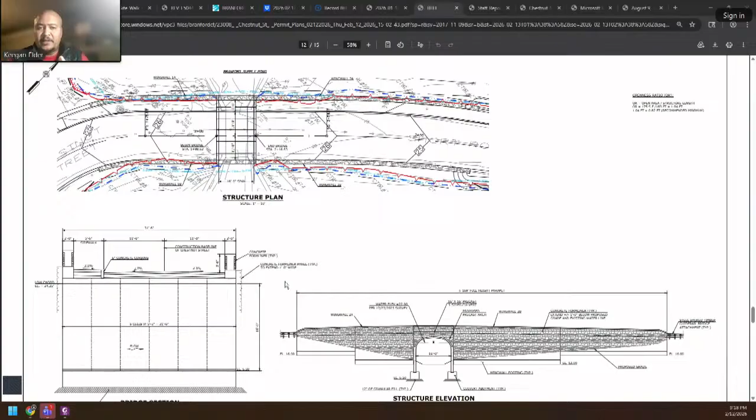So as far as sequence goes, erosion and sedimentation controls, E&S fence, silt fence will be installed first. They'll do cutting. They'll also remove the deck. Then they'll install the cofferdams and the remaining portions, the turbidity control curtains, and then continue construction beyond that. Okay, thank you. Yep.

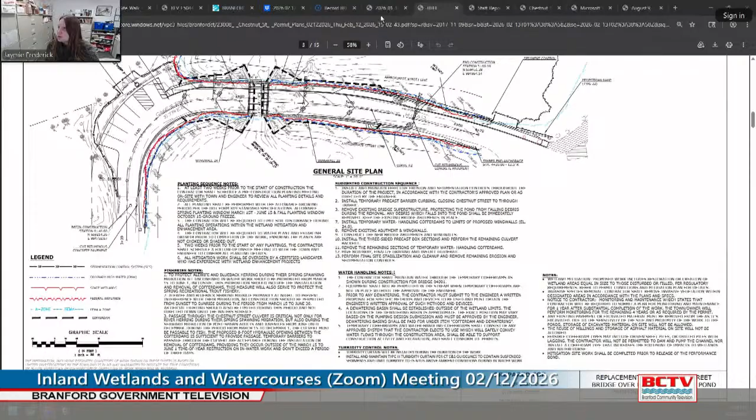This is Commissioner Bassermann. Anything else from Mr. Elder? Is it time to post that staff report, Jamie? If there's no other comments or questions from commissioners. Jaymie Frederick, the Wetland Agent. This is a town project, so no application fee. We are at the end of our time clock. This is where we got our extensions for closing the public hearing. So the public hearing really can't be continued past tonight unless you guys really want to have a special meeting.

Permanent impacts, they're estimating 516 square feet with 324 feet being filled and 192 being shaded by the bridge deck. And then temporary of 2,014 square feet with the associated grading and activities. We did receive a soils report. We received revised plans. This is actually before we received today's plans, so we're up to version 6 and exhibit number, I'd have to go to the exhibit list. I can look that up if necessary. We had public hearing notices.

Erosion controls, by and large, consist of silt fence, cofferdams, settling basins for dewatering, the turbidity curtain. We have received some additional details on that turbidity curtain, and a revised note to indicate no stockpiling of excavated materials on site. They are generally not proposing any stormwater changes or improvements, and are generally looking to mimic existing conditions with minor modifications relative to the walls of the new bridge.

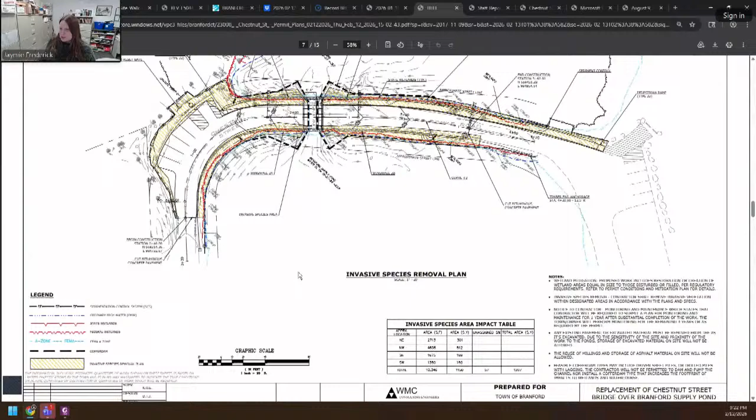So the comment I had that I wanted to mention is this review letter indicates, well, we're interpreting it anyways, to specifically apply to the Phragmites area. They're saying that this area should not be planted until it's been managed for invasives. So that means it wouldn't be planted for 3 to 5 years, which is a little bit different than what the commission has typically seen.

But I think part of the reason why I was asking how that was going to happen is because planting in a stand of Phragmites without excavating that soil is also something the commission hasn't typically seen. And I was questioning how that would be feasible, and managing it for a slightly extended period of time before plantings seems reasonable to me. I probably would come up with some modified language to our standard language on the monitoring with that in mind. But I just wanted to point that out real quick.

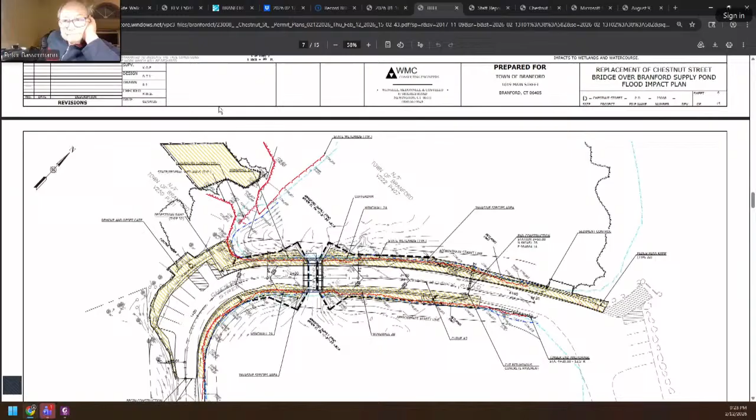And then prudent and feasible alternative analysis, we have the narrative exhibit 2 that outlines the considerations that were put forth and refuted as neither prudent or feasible. And then also we have the email from the town engineer responding to the need to replace the bridge. So I did not come up with conditions for consideration. I usually don't do that on a public hearing until the commission has closed the public hearing and started the deliberation process, and I kind of have a direction to take things in. I do also want to just jump back and note that the commission did make a determination that this activity may have a significant impact.

For regulation 10.3, in the case of an application which received a public hearing pursuant to a finding by the agency that the proposed activity may have a significant impact on wetlands or watercourses, a permit shall not be issued unless the agency finds on the basis of the record that a feasible and prudent alternative to the proposed activity does not exist. In making this finding, the commission shall consider the facts and circumstances set forth in subsection 10.2 of this section. This finding and the reasons therefore shall be stated on the record in writing. So any questions or comments from commissioners?

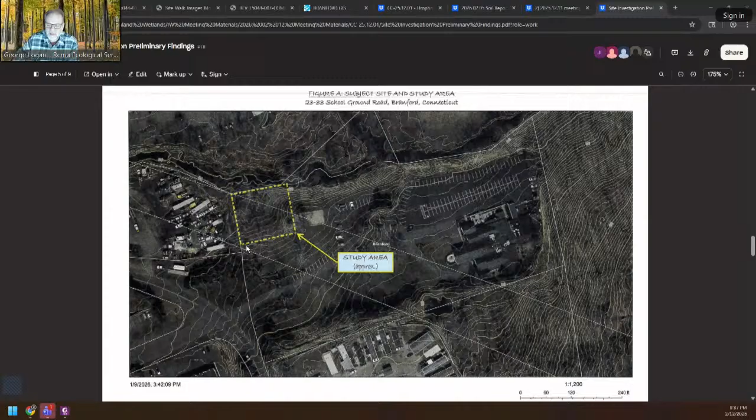so that's the site. So that little block is the area that I looked at primarily. And then if you follow, you'll see some pictures. So the next one, yeah. So what this shows you, obviously, this is not exactly from an aerial photograph perspective what's out there now because the trees have been removed by Eversource as part of their maintenance. But that dash line that you see there that says toe of slope is my rendition based on my little handheld GPS as to where the bottom of the slope, the toe of the slope is.

And then you can see two other arrows that show you the said isolated wetland, and we'll call it maybe about 7,000 square feet or something like that. That's also the delineated wetland. It's not delineated in the fact that you don't have flags out there except for those two flags that are right up against the toe of the slope. So what it tells you is to the right of the toe of the slope, there is a wetland, poorly drained soil.

The characteristics of the soils are interesting. There's obvious disturbance, sort of a mixing that's happened there. So you can see some fill, and it's mixed in with what I would call alluvial material that probably was transported from somewhere in the vicinity there. So it's a mix. So it's an aquent, I guess. It's a disturbed soil surface and horizon.

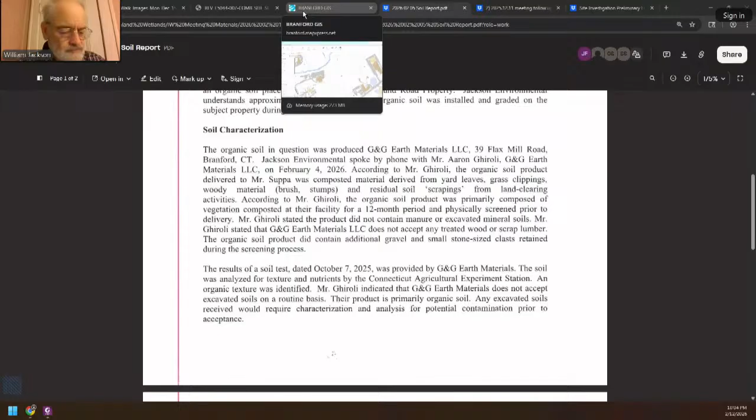This is Commissioner Bassermann. Jamie, when there's mitigation involved and material has to get brought in for purposes of making sure there's a good base for the plants to survive, we don't get any testing of that material that's brought in for mitigation purposes, do we?

Jamie Frederick, inland wetland agent. Oftentimes the plans may call out that there be testing, but it doesn't state that the testing needs to be provided to the inland wetland office. And I would say we have not been in the practice of receiving it. Not to say that it wouldn't necessarily be a bad thing to look at. But what it boils down to is that generally speaking, in those instances, a wetland scientist should be overseeing everything and they should be reviewing it. And honestly, they're more qualified than I am to look at the soil samples and results.

So I think that kind of speaks to what Mr. Logan was saying earlier about oversight is key. Of course, there was no oversight on the placement of material on site already.

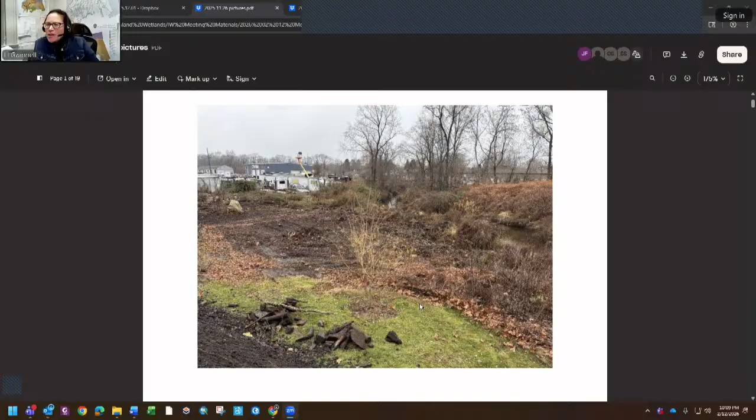So, no, actually, I don't know if it's in those pictures. It should be off to the side. So this is below, looking at the slope, obviously. And I think the pipe shown in the pictures from George Logan's report is somewhere in this area. And you can see that there's a pipe. I don't know that it's the same pipe, but there's a pipe, and then in the next picture you can see there's a second pipe.

There's two pipes. From the pictures, I can't see a pipe coming out from the fill, and I don't recall seeing one when we went out in December. At that point, the erosion control blanket had been installed, so maybe it was behind the blanket. That picture that you're seeing, I think that was the day that I went out there, and I was not out there this day.

Yeah, those pipes were leaning up on the side, and the guys actually had moved them while I was there, just shuffling them around, not trying to move them one way or the other. They were leaning against a tree, and they made them so they were laying on the ground, but just coincidentally.

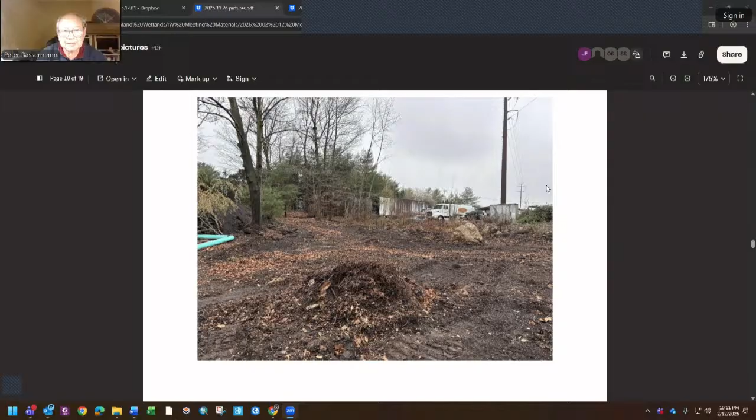All right, we're not going to make a decision tonight, other than decide when it's appropriate to reconvene or get an update and what that consists of. So, Jamie Frederick, inland wetland agent, we do have to continue the show cause hearing to a particular time. So I would recommend that we continue it to, let's say, we continued a lot of things to February 26th. Let's say March 12th.

And depending on what additional information we have, I would say it'd be really nice if we can have at bare minimum the full wetland delineation of at least the wetland that's not under the slope, the fill material. That would be beneficial, I think, for consideration, and an update on when an application will be submitted. And hopefully you're able to find a surveyor that can help you get that moving along.

Does that make sense to, I'm going to start with the commissioners. Does that make sense to you? I'm not seeing any. Works for me. Works for this man too, George Logan, for the record. All right, and I was going to say for the respondents. If it works for Mr. Logan, we'll make it work. All right, so we're going to continue the show cause hearing to March 12th. Yep. Yes.